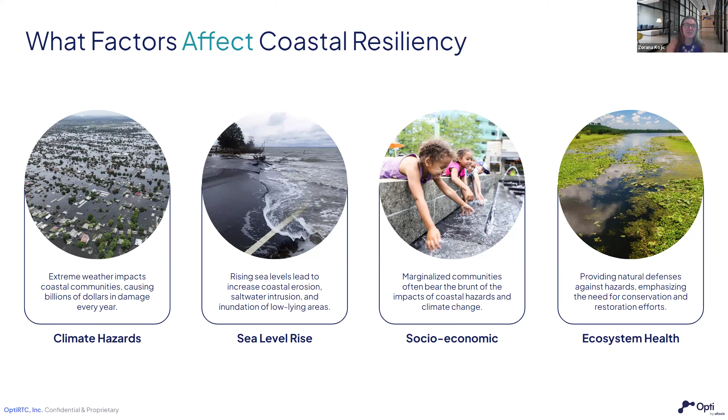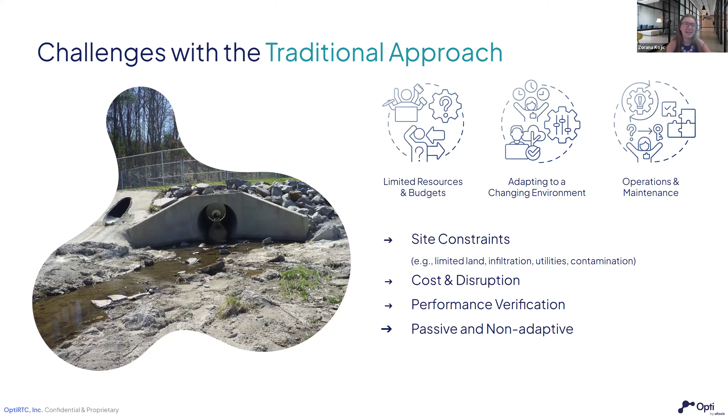And then the last piece is traditional infrastructure for stormwater has most of the time been passive. And it really can't adapt. Once it's in the ground, it's set it and that's it, we're done. So what are some of the things that we can change? And we're going to get into that with real-time data.

So moving on, one of the things that we can do to go from our traditional design using just gray infrastructure is we can invite diversity, not just in the community with people, but we can invite diversity in our designs. And many of you, I'm sure, have been exposed to green infrastructure, low impact development. Even on a homeowner scale, a rain garden can be so helpful for removing nutrients and helping that neighborhood stormwater pond. And then the last piece of the equation would be smart infrastructure.

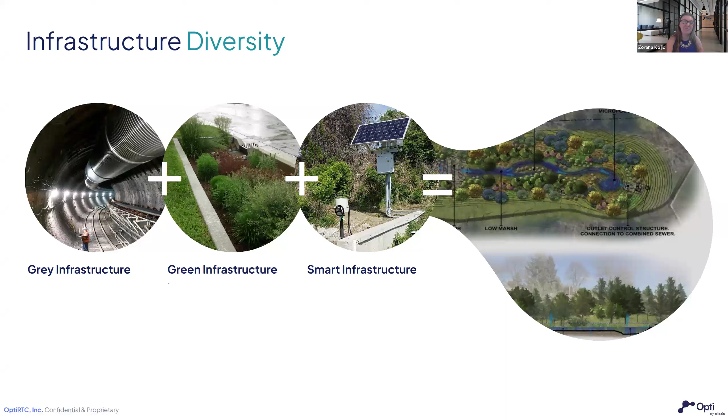So continuous monitoring and adaptive control is definitely a great application of smart infrastructure. And now how do we combine all of that together to then create resilience for everybody, for our communities? So let's dig in a little further.

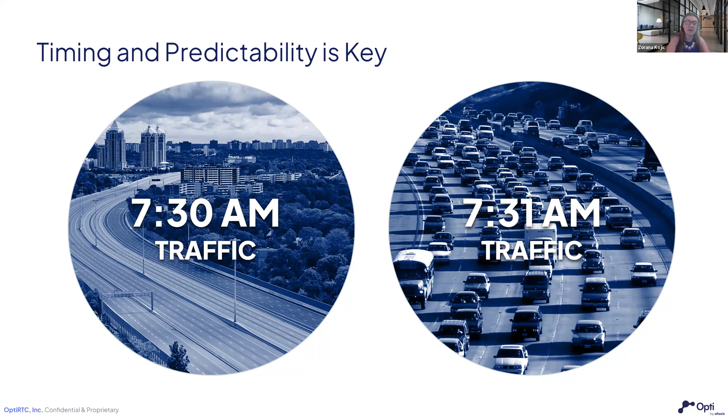So how can you design stormwater infrastructure that's adaptive to such stark changes? And we can do that with real-time monitoring and control. So if we think about a typical urban stormwater collection system, we've got the community, and then we've got our stormwater system that might go into a vault, a pond, or a form of green infrastructure. And then it ends up in the receiving body.

For our sewerage system, it goes to the wastewater treatment plant, it treats it, and then it goes into the receiving body. And one most important thing to note here is the stormwater does not get treated. Maybe it gets some treatment from the natural landscape, from the green infrastructure or the plants along a pond, but that's it. So whatever happens in the urban environment directly impacts the receiving waters.

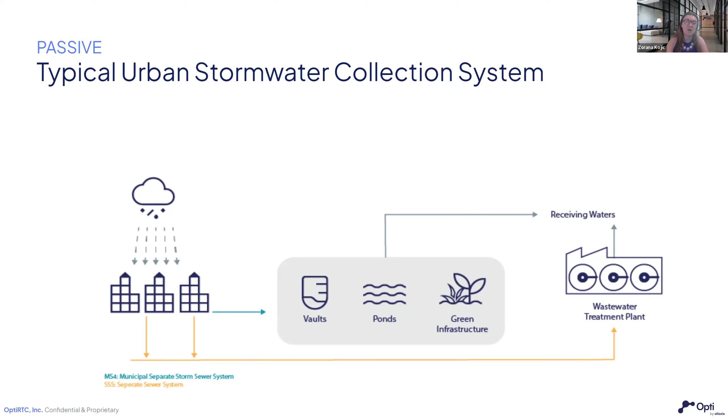And there's no control about how much water, what quality, when. You have no control of how that water is moving once it falls. Now, if we think about an adaptive system, we get to add and we get to have a little bit more control.

So through continuous monitoring and adaptive control, we are able to get insight. So what do we add here? So through Opti, we're taking in weather data and third-party data to then control the level of the pond or level of a vault. We get to control when the water is released.

So that insight and control definitely changes the picture for a stormwater manager, because they're able to see in real time what is happening with that piece of infrastructure. B, they're able to control from the safety of their office what is happening, or use the inbuilt platform to decide when to open and close a valve at what time to create the best scenario for that infrastructure piece, whether that's improving water quality or mitigating erosion. So that is the benefit of having extra insight.

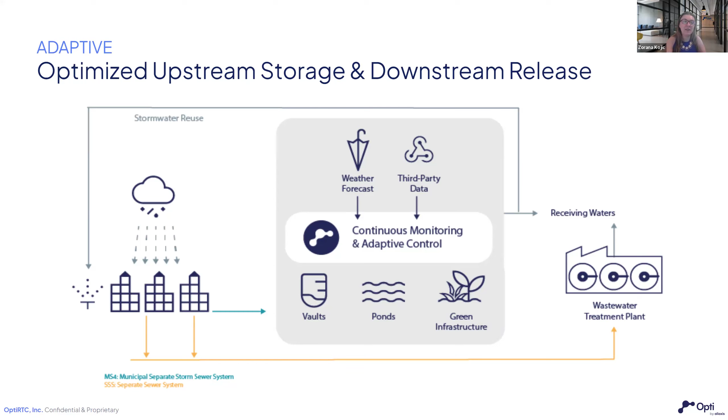And furthermore, when we talk about the different things that real-time monitoring and adaptive control can bring you, it's one platform, multiple benefits. So with one software and the associated hardware, you can control at various points in time. You can control for flood mitigation, hydromodification. In the case of communities that have combined sewers, you can control for combined sewer overflows. You can improve water quality. You can create water conservation.

We have a project where there is a vault below a building, and that stormwater is then piped up to the rooftop where there's a rooftop garden. So that stormwater is being conserved and reused, which is really wonderful. And then last but not least, maximize asset performance. You get that insight, what's happening in real time and what can I do?

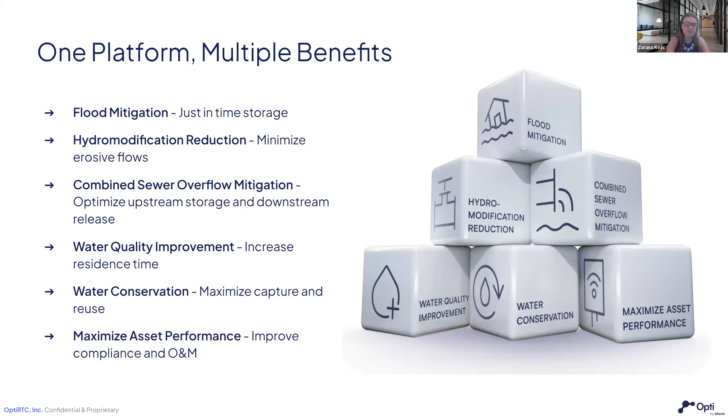All right, so the two components of a continuous monitoring and adaptive control system include the software and the hardware. So for the software, we are using precipitation information, so typically a forecast, to then drive what happens with the hardware. We have a web portal that's access for O&M, and then we can also integrate with third-party providers. So if you wanted to connect your SCADA to Opti, you could do that.

And then the other side of it is the real world side, right? So when you go to that piece of infrastructure, whether that be an underground vault or a stormwater pond or another form of stormwater asset. So the hardware includes actuated valves or a pump. It includes level sensors. It includes a control box that's sending all of that data to the cloud, where the stormwater manager or the O&M manager can then see what's happening with that asset in real time.

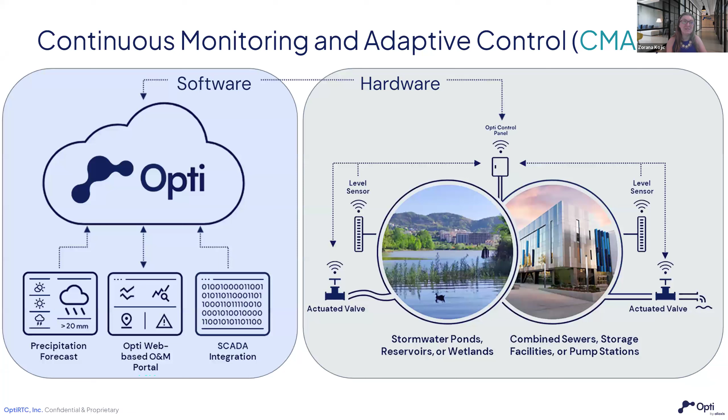So to summarize, we partner with third-party infrastructure providers to deliver the hardware and storage solution. On top of that, we layer IoT devices to control the rate, timing, and discharge based on the forecast. And then the unique part of Opti is that we can integrate that third-party forecast, such as NOAA or Tomorrow.io, and SCADA to create almost like that, right? The smart infrastructure that we saw earlier.

All right, so this is what it looks like in the real world. So the left picture, you can see the stormwater structure, right? So this is the overflow. And then you are maybe not able to see it in the left picture, but in the right picture, you can see inside there's a valve that's connected to a control box. And in this case, we've got a solar panel and a rain gauge as well.

And then the right-hand picture is showing an underground storage solution. So same thing, you've got an actuator and a valve assembly, a pressure transducer, the control box. There's also a stilling well, and then you're able to see the outlet structure here as well. So various applications for the same technology, you just get to use it in a different way.

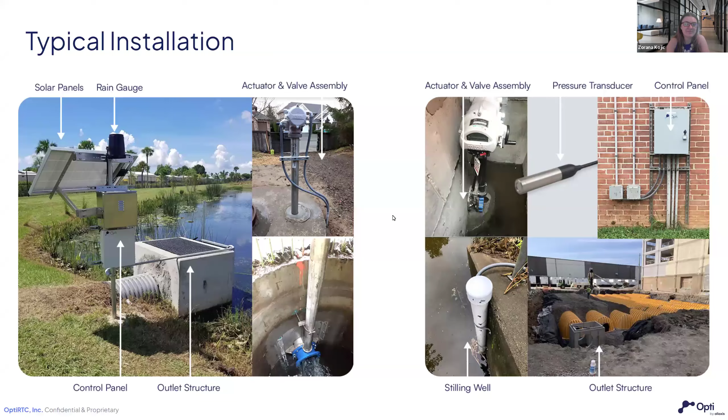All right, so what does a stormwater manager see, once they want that insight into the system? So from their computer, they're able to see this screen. So it has a manual override if someone wants to take it out of the system. They can see the current conditions, they can see the forecast, they can also see whether it's online or not. So that's also really important when considering the information.

And then on the right side of the screen, they're able to see their managed storage, their cumulative rain gauge, as well as the valve position. And all of that data can also be exported. So if there were multiple areas that you wanted to share that information to, you can also share the screen as view only with other members of your community, whether that be other people within the city staff that just want insight into how it's operating.

Or maybe this might be a project where you want to empower the community to see what's going on with that control thing by the pond. Well, they can go and look it up themselves without any issues of them changing anything with a view-only access. So that's pretty great as well.

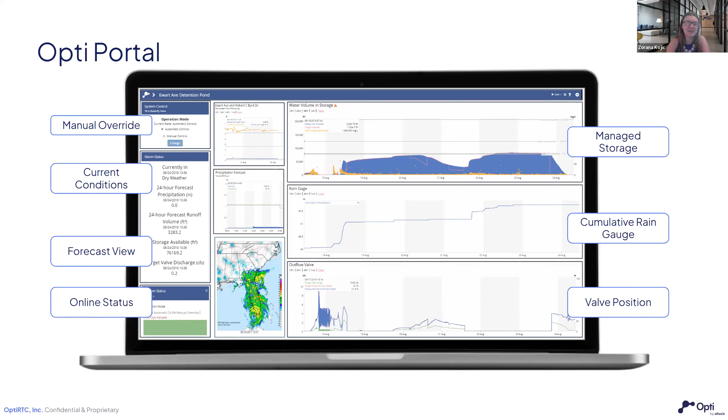Okay, so let's talk about how all of it works. So if we go back to the passive model, right? So we'll have dry weather. There will be a rain event, the level of the pond increases. And then once it gets to the level of the overflow structure, it gets released downstream. And that release might happen very quickly at a very high velocity, which might be damaging downstream, causing erosion, water quality issues, things like that.

Now, let's layer a CMAC system on that. So if you take a look at the blue line, what are we able to do? Well, based on the forecast, we can cause a pre-event drawdown. So we can lower the level of the pond just enough to create adaptive storage using the pond or underground structure that you already have. So as it fills up, right, we see the level here rising.

And then one key difference, if you take a look, the orange line goes to a peak and immediately goes down, right? You're releasing as soon as it gets up to that level. But if you take a look at the teal line, it holds the level steady just below the overflow volume. And what happens during that time is that's where you're kind of banking on your water quality. So by allowing the particulates, the phosphorus, to settle out over time, you're improving the water quality that then gets released downstream.

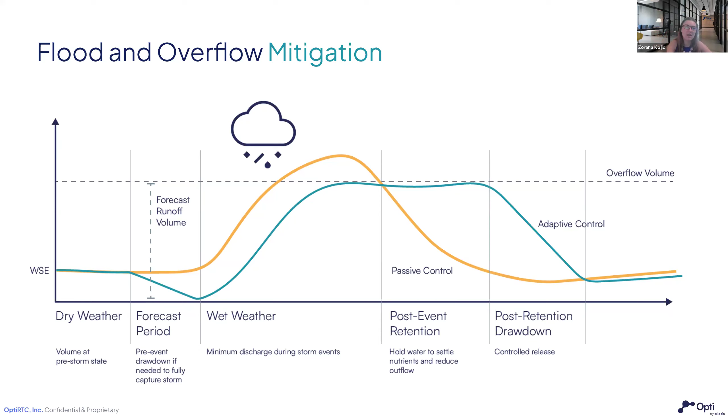So when we think about the design project, we have to think about the drivers of this project, but also the application, right? So some of the drivers include flooding and water quality. And so the application thereof is optimizing that existing asset. A driver could be cost and land availability. So maybe by using continuous monitoring and adaptive controls, you are able to use the land more effectively. Maybe you needed way more storage, but now you can control the storage that you have. So you're better able to develop that land compared to having a humongous stormwater pond.

And then the last driver here is resiliency, right? That's why we're here today. Resiliency and environmental compliance, and a smart watershed network can definitely help with that.

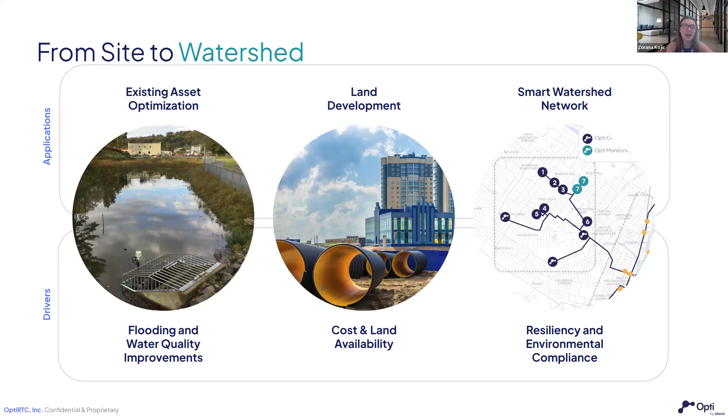So when we think about all of these controls and the software associated with it, there's often a lot of questions about security, reliability, and redundancy. And just like any good engineer, we've built that into our system. So we've got cloud-based alarms. We've got remote manual control that you can change it into. We've got internationally certified data centers, as well as product release cycles and third-party security audits.

And then from a mechanical perspective, we've got battery backups, local fail-safe logic, and on-site manual control, so you can literally change it at the control panel. And then from a civil design perspective, you can always go back to a passive overflow and get downstream condition assessment.

All right, so just a little bit more about the CMAC solution design. Again, when we think about passive assets, right, the regular traditional way of building stormwater infrastructure, once it's in the ground, you can't change anything about it. But one of the things that's great about CMAC is that adaptation. So even once you get the hardware installed, you're not done. We can still optimize it. And that's the thing that's really beautiful about the system.

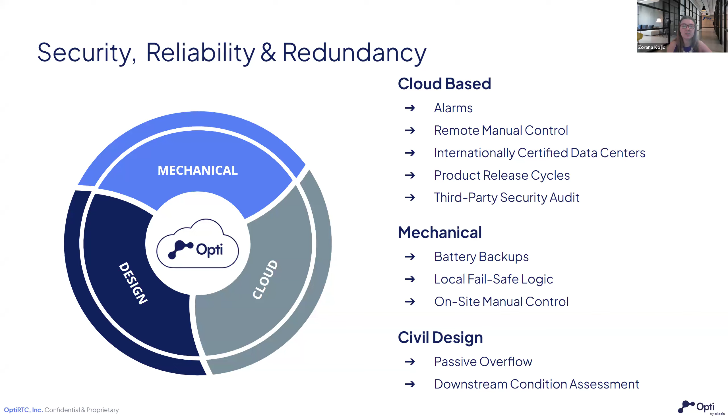So in a typical design process, we can identify stormwater challenges, select the behaviors, and then establish and refine the key parameters and develop an H&H model and simulations. But even once installed, or even during the design process, we can keep going back and changing those parameters to what a community might need. And one example I'll quickly give is, we have dry weather times, right?

Dry seasons and wet seasons. And those different seasons might drive what is needed for that piece of infrastructure. So we can change the settings to then deliver on that result. So if we want to hold on to water longer, or if we want to release it sooner, we can keep changing all those parameters to what is needed in the moment or what is needed for the season.

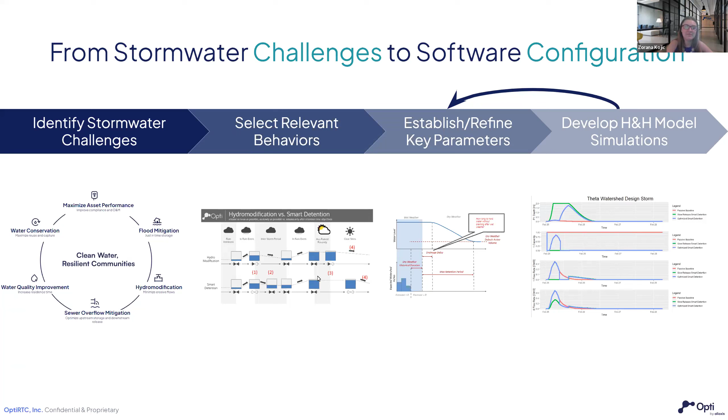And that's one of the things that's really, really awesome, because you're not stuck with what was built. You can keep working on it. You can be adaptive, you can optimize, and you can be resilient through all those different changes. And this is one of the things that we just talked about as well. So we talked about the 5 different stacked benefits earlier, about dealing with flooding and water quality and erosion control and asset performance indicators.

If we think about that curve that we saw earlier, as the water rises, let's say within a stormwater pond, it goes up and we hold on to it. Well, what we're really controlling for is either shifting that peak, either causing the release earlier or later, or we can smoothen the peak. And that's why, with all of these different changes that we can do in the optimization stage of a project, or in the design stage, we can invite those behaviors within the system.

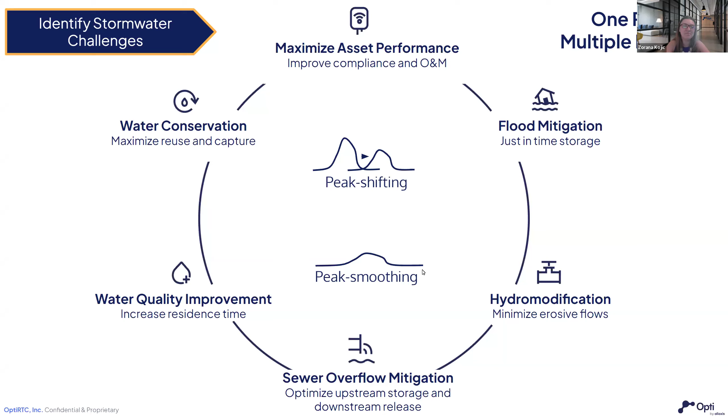Okay, and then just last time through, with passive control, it's really hard to control what happens. And then if we have CMAC, we can control those behaviors. And if you take a look at this particular slide, there was a pre-event drawdown. It fills up during the storm, but then there was even more water during the storm, and there might have been a possible overflow event. So even in the middle of the storm, we're able to adapt, and we're able to gently release a little bit to then create even more storage as the bigger storm continues.

So you see that little divot in the center of the storm, and then once the storm event passes, again, hold on to it, get that water quality benefit, and then release at a nice slow rate, controlling for erosion.

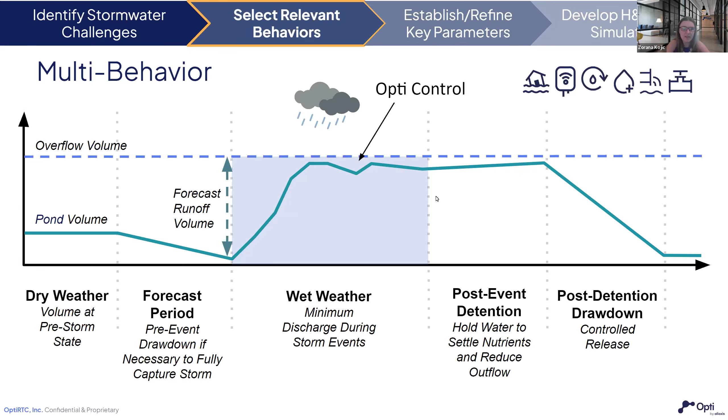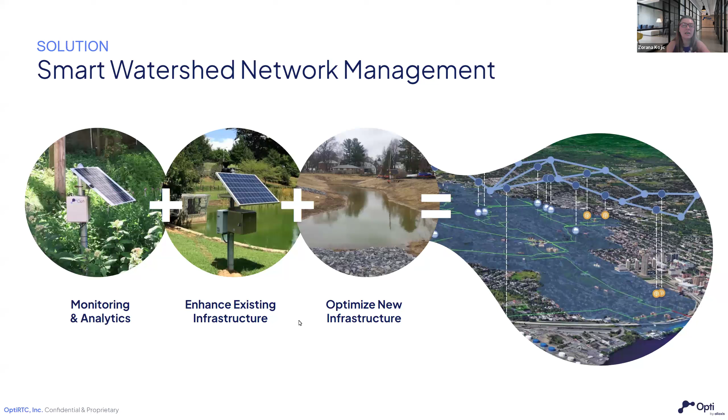Okay, and then let's run through some of our case studies. So we've got Statesboro, Georgia, Casselberry, Florida, and Ormond Beach. And quickly, we just want to say that we love working with our communities as well as our consultant partners. Your local expertise plus our technology creates the clean water and resilient communities that we're all looking to have. And sometimes it involves building that smart watershed network, and we've touched on that before. So let's dig into Statesboro, Georgia really quick.

So they had some flooding issues and regularly had some complaints of roadway flooding near the Lake Sal area. So to mitigate that risk, the city needed to improve storage for a 25 and 100-year storm event. And using the existing system, it would require extensive rehabilitation with an anticipated cost of up to $11 million.

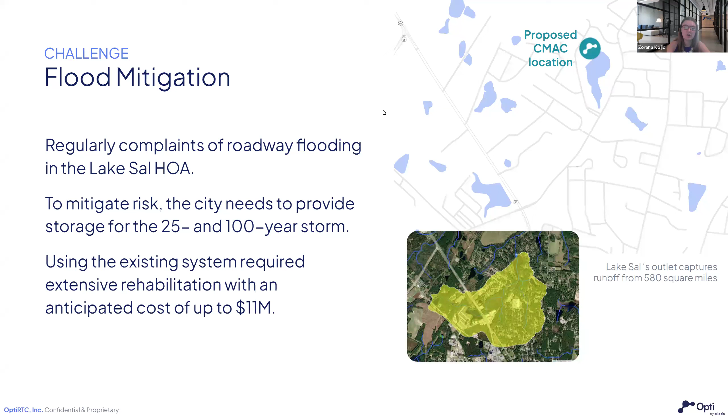So on this project, Goodwyn Mills Cawood, GMC, developed a watershed model of Lake Sal under Task Order 3. And the results of that model showed that under current conditions, a 25-year event would cause the culverts and channels entering Lake Sal to exceed capacity, and then cause flooding upstream. And so a solution that was proposed was using CMAC.

So one of the benefits that CMAC created is looking at the entire watershed. So upstream of Lake Sal is where a lot of the flooding in the past had happened. So we really needed buy-in of the community to create that improvement on the outflow control structure to then be able to mitigate the flooding upstream.

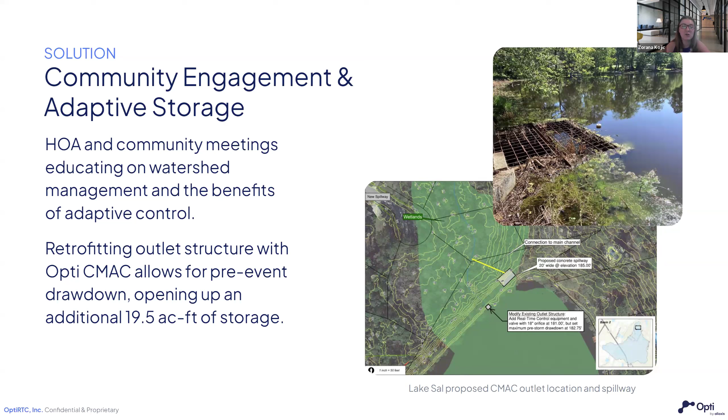And this is such a great story of community engagement and adaptation, because through a concerted effort of the city, the consultant and Opti, we were able to communicate with the homeowners about this system that doesn't directly impact them: how does it impact their entire community, and how can they be part of the solution to improve the overall watershed, thus improving the overall flooding problems that had been there in the past. So this is an ongoing project, but I feel like this was just such a great study of resilience through community engagement.

And some of the, can go back. Okay, and then some of the benefits here are reduced CapEx, resilience through flood mitigation, and improvement of public safety.

So the second case study that we have here is Casselberry, Florida. This is just a little north of Orlando. And the project that we had here was installing just monitoring for this Gee Creek, which feeds into Lake Catherine. So this improved asset management for this community because it gave them visibility to what was happening at that creek in real time, so they can then take the actions that they need to mitigate any flooding that might happen in the surrounding neighborhoods of Lake Catherine.

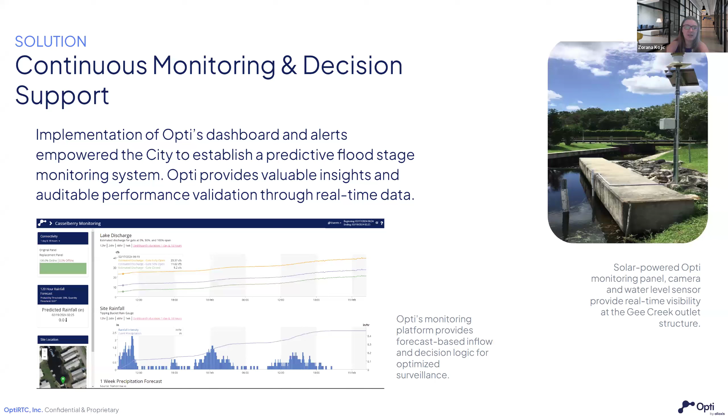And so, over the course of, I think, the past like 7 years we've been there, just monitoring, providing them data so they can make those decisions for their community. And the benefits thereof, of course, that peace of mind is the biggest benefit. And I'll just read the quick quote from Kelly Brock, the Public Works Director: Real-time telemetry, coupled with the city's previous modeling efforts, has enabled the city to better prepare for and respond to major storm events. So I think that's been really great that we were able to help with this.

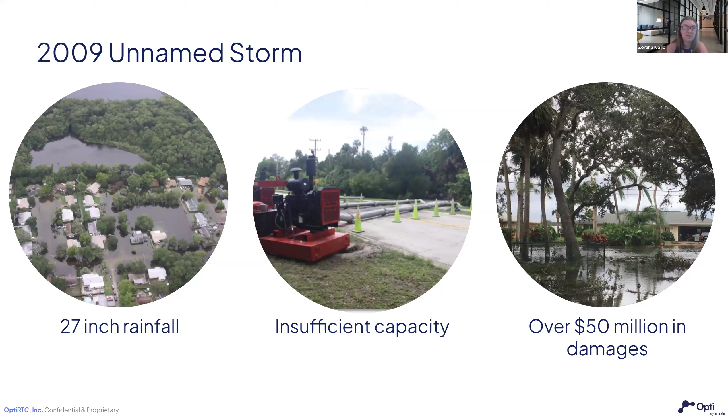All right, final piece de resistance here, Ormond Beach. Let's talk about hurricanes. So back in 2009, there was an unnamed storm. It caused 27 inches of rain. They did not have enough storage to deal with that unprecedented amount of rain. And unfortunately, it caused over $50 million worth of damages in a neighborhood surrounding 5 lakes. And so these are these interconnected lakes, and the areas that flooded were the surrounding neighborhood.

The city of Ormond Beach was able to secure FEMA funding after that 2009 storm. And then they had a few options of what do they do with the money? And so they could build a new pump station to keep the water below flood stage, or they could allow CMAC to control the pump station. And so the costs were $8 million for a new pump station or $200,000 for the software and hardware. So they decided to go with CMAC, and this created a CapEx savings of $7.8 million.

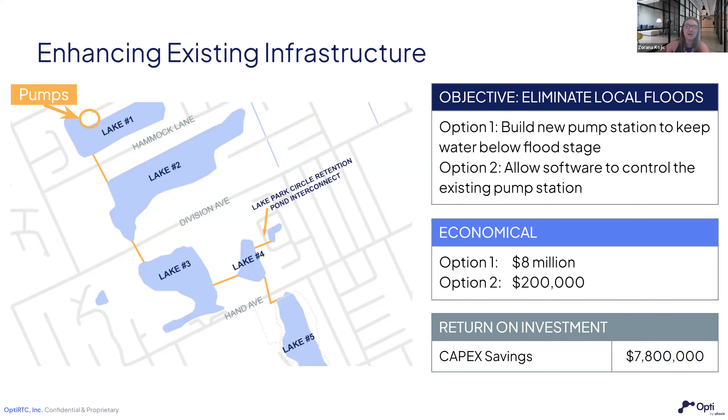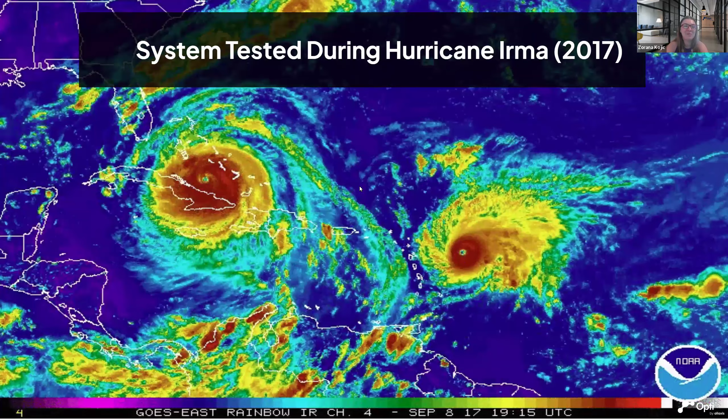So you see they got 8.7 inches of rain over the course of 3 days. But thanks to Opti, we were able to cause a pre-event drawdown, create adaptive storage using the site they already have. And even though it rained all those inches during Hurricane Irma, the neighborhood still didn't flood. Yes, the level increased, right, to 4 feet, but it was still below that flood elevation. And that's how we are creating continuous resilience for that community.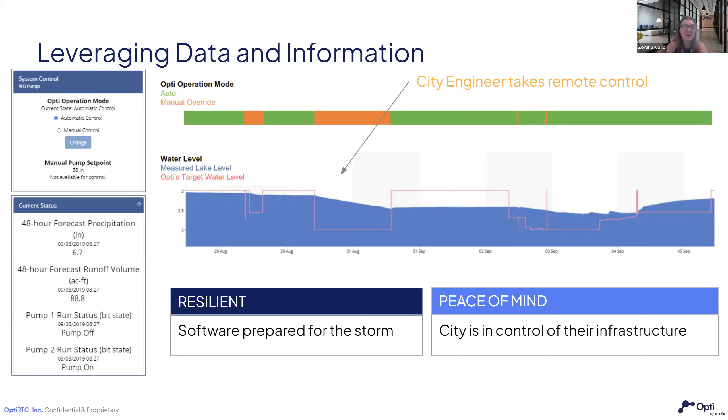And with that, I want to be mindful of our time. So thank you guys so much for listening to our presentation so far. We're going to jump right in to our quick little panel discussion and then create time at the end for any audience questions. So if we can unmute Rob.

So Dr. Rob Brown will be our first little panelist. Dr. Brown is a senior resource engineer with GMC, Goodwyn Mills Cawood, based out of Brunswick, Georgia. Rob has extensive experience in green infrastructure and low impact development, as well as stormwater management. He is a licensed civil engineer and has completed a postdoctoral fellowship with the US EPA's National Risk Management Research Lab to study green infrastructure and low impact development practices.

So Rob, today we're going to ask you this question. In the communities that you serve as a consultant engineer, how receptive has stormwater leadership been to the paradigm shift of adaptive controls to meet their resilience needs?

Thanks, Zorana. I would say that they're very receptive to it. I've only reached out to a few different public works and engineering department leadership at the municipalities I work with in coastal Georgia, and they've been very interested and excited about the opportunity to use continuous monitoring adaptive control at some of their project sites where they've experienced flooding issues.